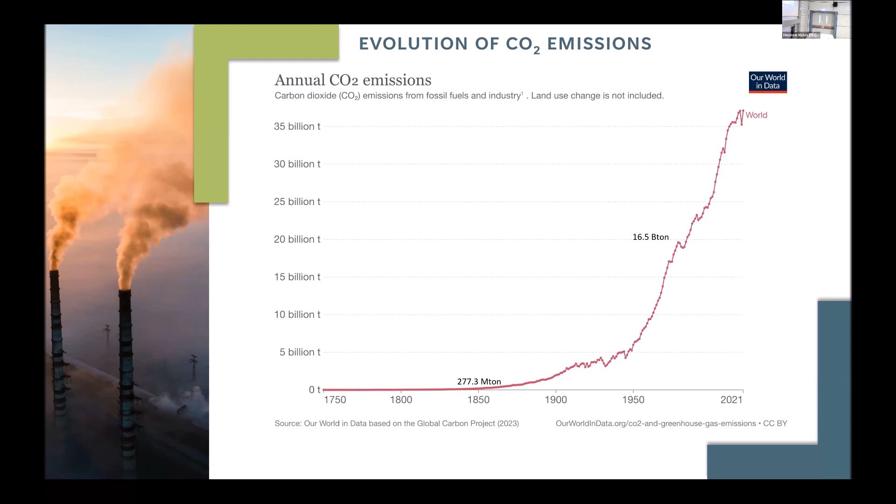When we look at that time, around 1856, we find the first recollection of a study regarding the effect that CO2 can have in the atmosphere. This woman, Eunice Foote, is a remarkable scientist, but also an amazing woman because she was responsible for women gaining the right to vote in America. She made a simple and straightforward experiment where she placed CO2 inside glass cylinders with a thermometer, and placed the cylinders in the sun. The ones with CO2 and water had a higher temperature, so she concluded that an atmosphere enriched with CO2 could in fact lead to higher temperatures.

So we had this information many years ago, but still we continued to develop our fossil sources based economy, and now we must solve this problem in a very short period of time. We could have had lots of time to start thinking about these things, but in fact only in the 70s did the first meeting of the United Nations occur to try to solve this problem. So we have a time span where we didn't do anything about this issue, and now we have to solve it very quickly in order to have a planet for the generations to come, and also for us to live a normal and healthy life.

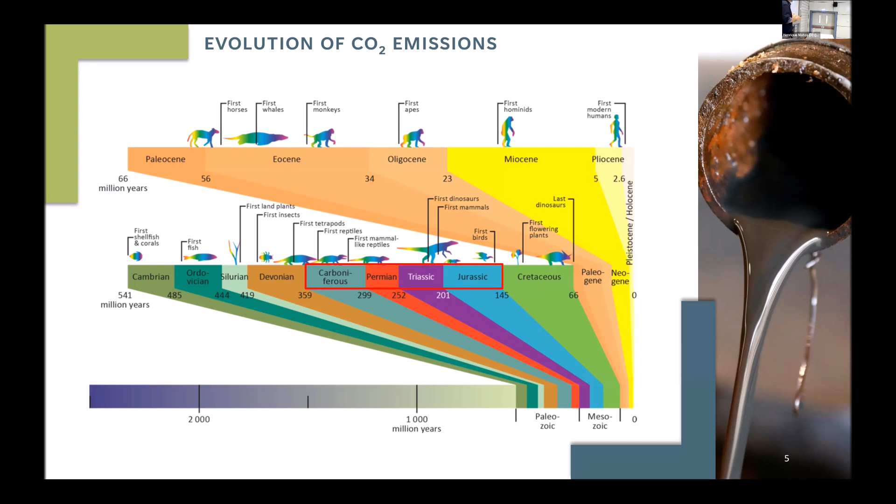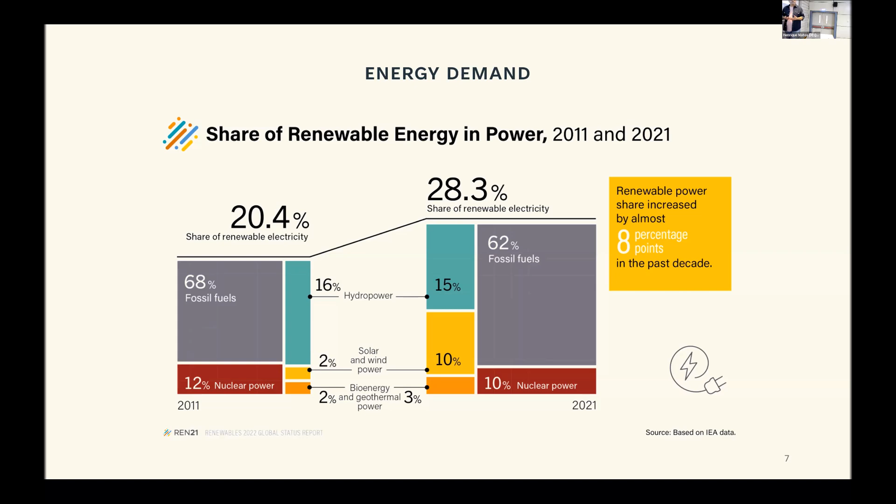When we look at chemicals, for example, they are still more than 80% based on petroleum sources, and we want to decrease this dependency. Regarding energy, we still have a lot of dependency on fossil sources - for example, more than 60% is still based on fossil sources. So we must find alternatives to this dependency.

And what can we do? I look here and I see lots of persons - Professor Carlos, Professor Enrique, Professor Joana, Professor Filipe - all working on trying to solve this problem. I think that in the end, the solution will be a contribution of all these works for a common good, because there will not be just one solution.

And of course we can do a lot, and while these processes are being developed, improved, and optimized in order to be more efficient, we can try to find alternatives. For more than 100 years now, carbon dioxide has been acknowledged as a raw material. We can use this raw material to produce several chemicals and energy. We know that carbon is the base of life.

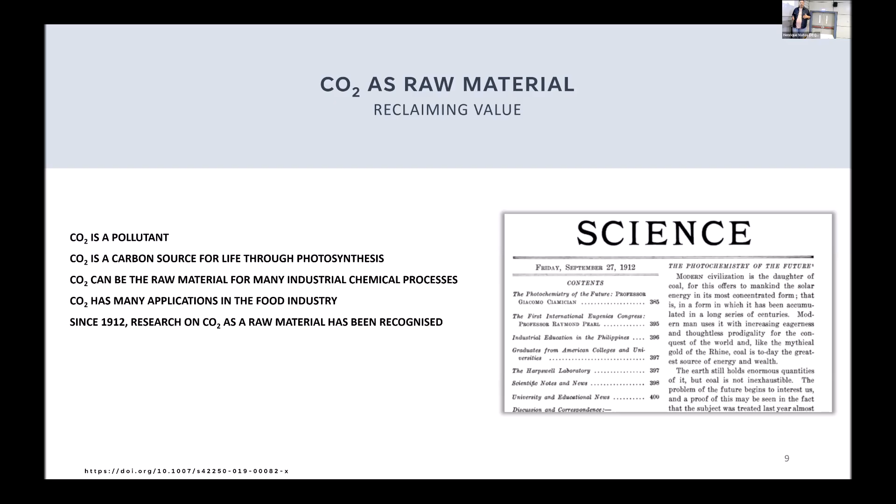So we have to start looking for a way to capture this CO2 in order to make materials, chemicals, energy, and most of you are working on those technologies. But meanwhile, while we cannot have the technologies mature enough or efficient enough to allow that we can capture the CO2 from the atmosphere and make it at rather larger scales, and also because I also think that the final solution for the problem will be a collection of several technologies that can somehow complement each other in order to achieve the neutrality that we are looking for.

And biomass, we know that biomass is a way, it's a raw material that is abundant, it's renewable, it's available, and it's carbon neutral. So we can look to this raw material and try to find ways to transform this raw material in something that we can use to make chemicals, to make materials, to make energy.

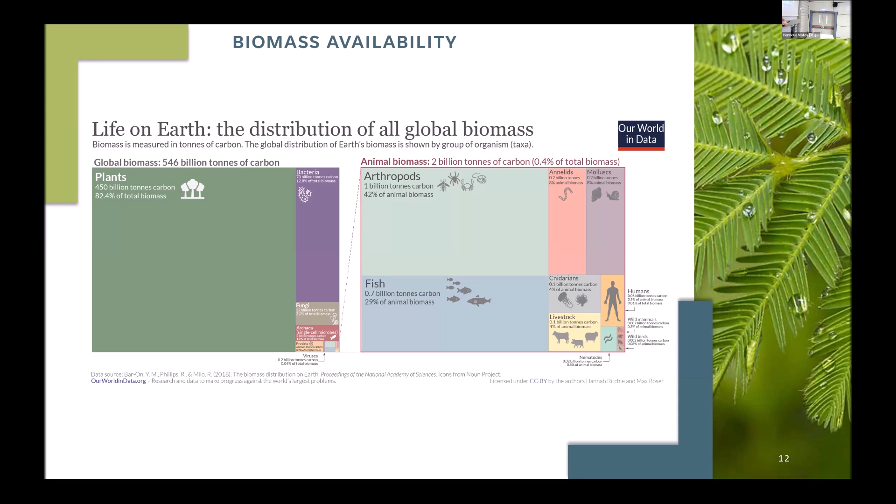And even more, because when we look to the global biomass, the plants are 80% of this biomass. And to put in perspective, animals are just 0.4% of all biomass. So we will see that plants are widely available and abundant. The challenge is how can we use plants to make materials, for example, plastics, fuels, and so on.

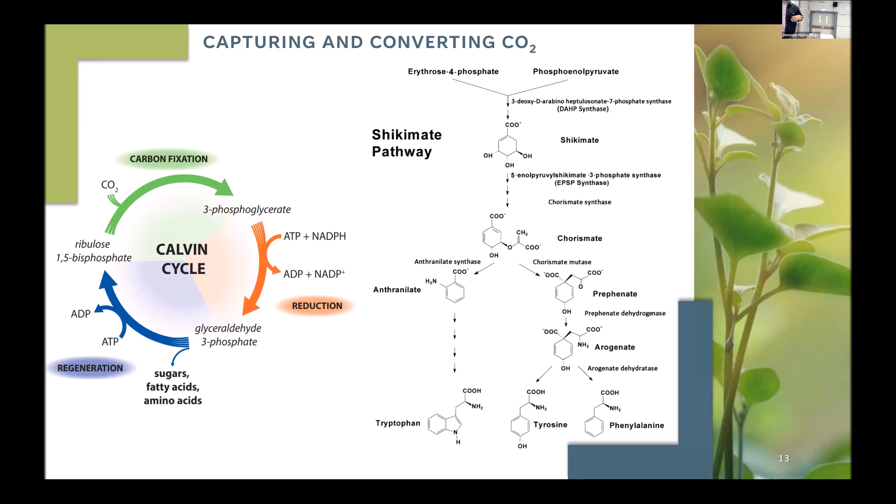We know that plants, through photosynthesis, can convert CO2 into sugars. Then those sugars, those carbohydrates, can be converted into, for example, phenylalanine through the shikimate pathway, and phenylalanine can then be converted into alkyl phenols. And we know that these carbohydrates and these alkyl phenols are then the main components of the three most abundant biopolymers: cellulose, hemicellulose, and lignin.

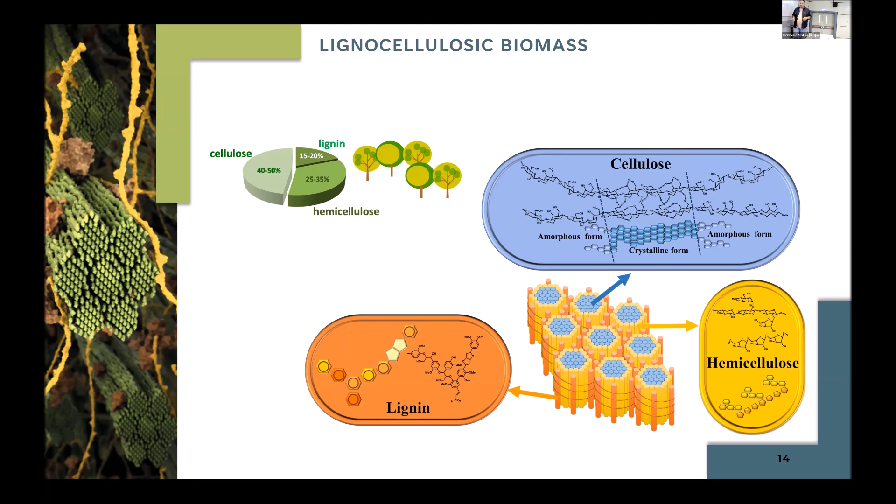So we have these three biopolymers, and now we just have to see how can we process these biopolymers in order to have something that we can work with to produce those chemicals, those materials, those fuels. And there is a lot of technologies that we can use to process biomass.

Well, the most primitive one was in fact used for combustion to produce heat. But by producing just heat or by combustion, we are losing all the potential of the biomass.

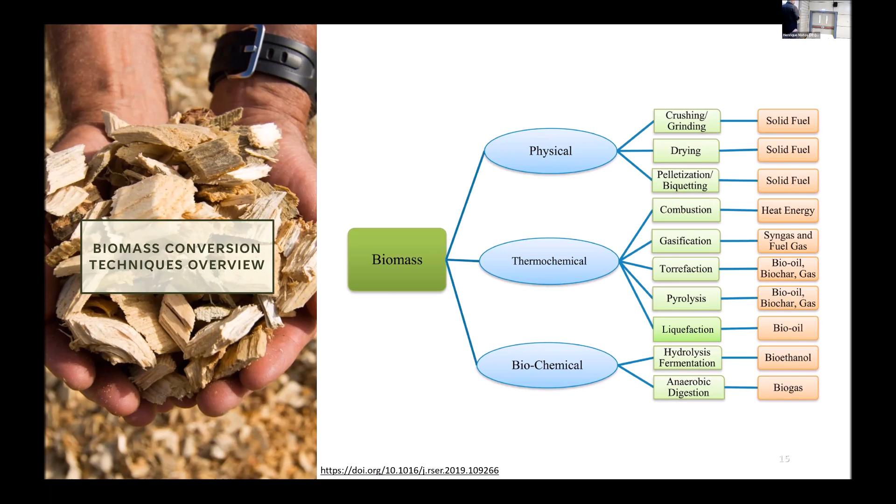The process in which I have been working on and in which I am most interested is the thermochemical processes, in particular those that can produce bio-oils. The bio-oil can then be used for several applications. In particular, to produce bio-oil, we have fast pyrolysis, hydrothermal liquefaction, and solvolysis.

On the other hand, the hydrothermal liquefaction and solvolysis, we can work with the biomass with moisture, for example. The one that I've been working with is the solvolysis. Hydrothermal liquefaction has to be conducted with high pressure and high temperatures, and the solvolysis can be conducted at atmospheric pressure and with the addition of a catalyst.

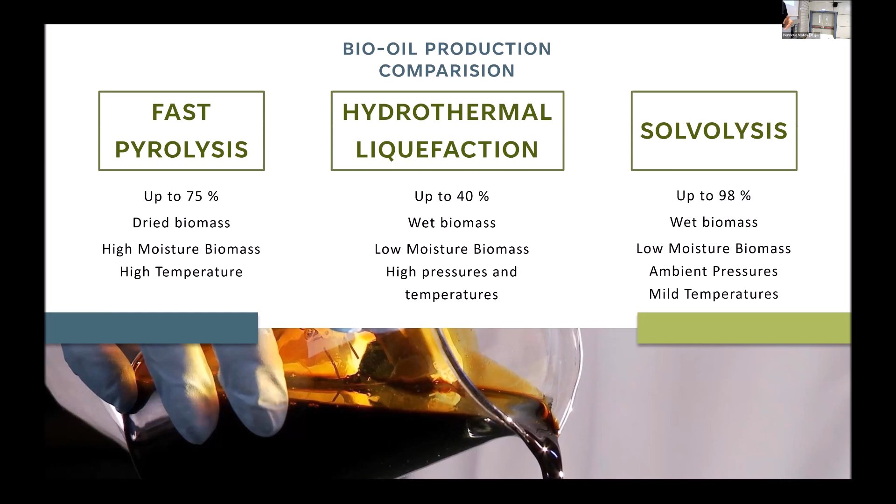Of course, the yields are different. Of course, for example, the solvolysis, the one that I work with, has the drawback that it needs a solvent, so we must look for greener solvents. But on the other hand, it requires less expensive equipment to work.

Regarding the composition, of course, we have different processes to produce bio-oils, and of course we will have different bio-oils. The one that I've been working with, the one from solvolysis, has the lower amount of oxygen, because most of the oxygen that is present in the biomass is eliminated through the dehydration during the process, and we lose that oxygen as water. And because water is being removed from the reaction as long as the bio-oil is forming, we are left with a bio-oil with less oxygen.

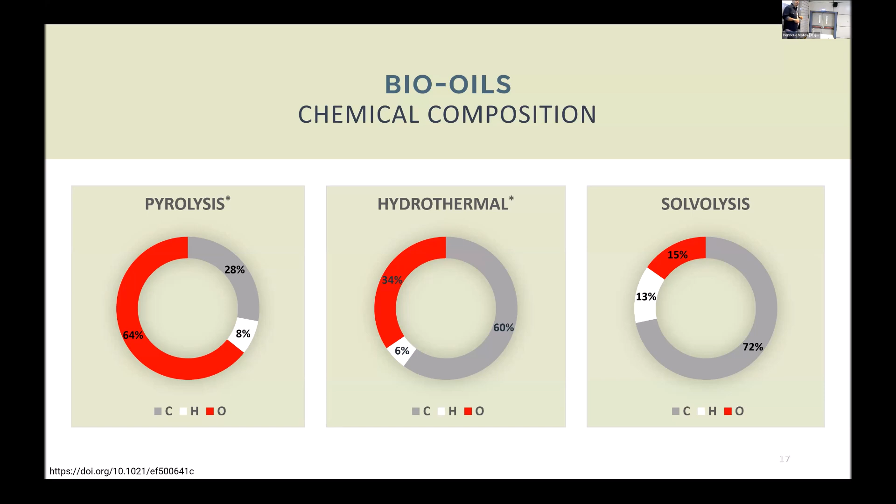So, and it is this part that we have been investigating, the applications that bio-oils can have. Because the production of bio-oil is quite well studied, the applications is where we have to make an effort in order to have real-life applications of the bio-oils, in order to see if we can apply this then in the future at a real-life scenario.

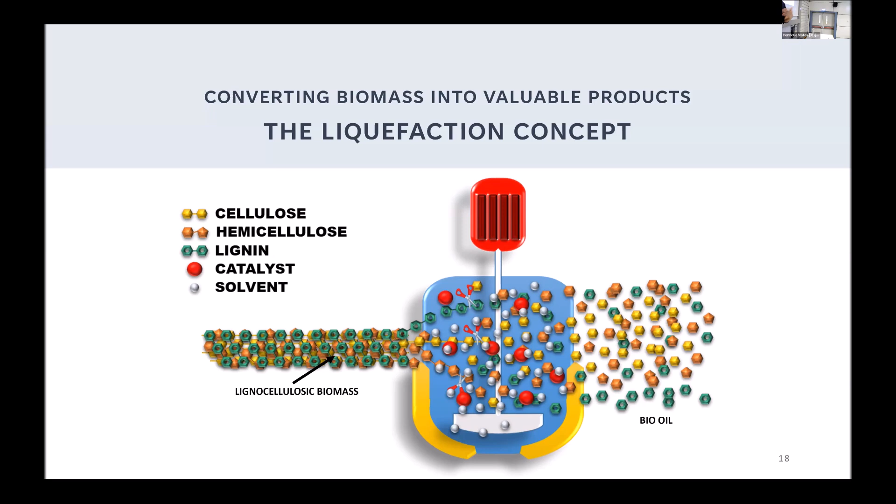So mostly what we do is we collect biomass and residues, we make the liquefaction, then we can separate those bio-oils into different fractions. For example, if I wash the bio-oil with water, I am left with an aqueous extract, an organic extract, but then, for example, I can distill the bio-oil and have a lighter fraction and a heavy fraction, so I can play then with the bio-oil in order to obtain some feedstocks for several applications.

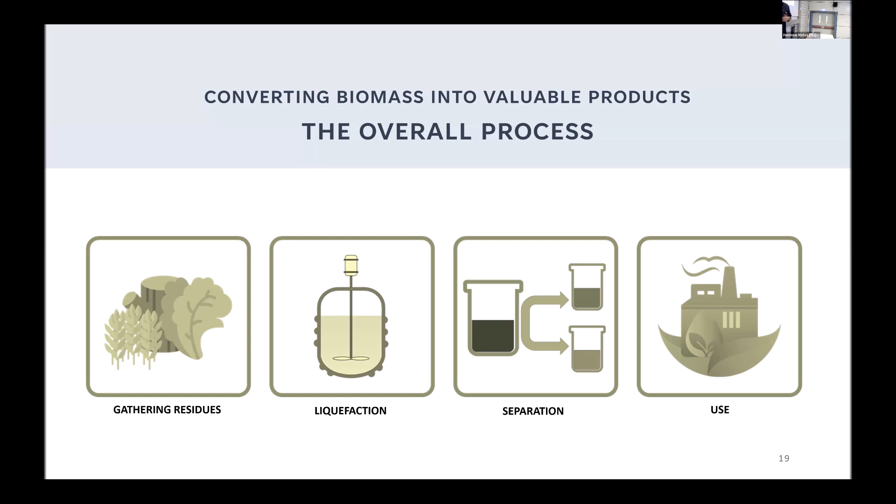Of course, we have applied this to lots of substrates. In particular, we are very interested in valuing residues. So we have applied this to sludges, to manures, to agriculture residues, to food residues. Well, we have applied this to a whole bunch of biomasses. It works well with almost any type of biomass, even with those with high moisture. For example, potato skin, potato peel has 80% moisture and it works quite well. Sludges, which also have a high amount of moisture, also work quite well.

And of course, in the beginning, we started doing the liquefaction with 2-ethylhexanol, which is a fossil-based solvent. But now we have moved on and we have studied other solvents, ones based on glycerol, for example, that are more sustainable. And that also gives very good results.

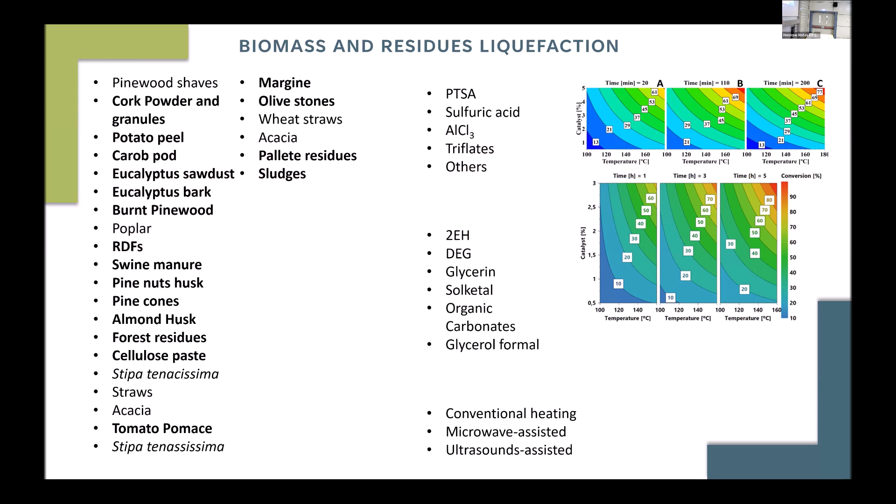The reaction can also be promoted with ultrasounds and microwaves, but what we get from using those technologies is not enough to start using them, because we have an improvement of 2 or 3% on yield, and it's not enough. So basically, as I told you, we have the biomass, we produce the bio-oil, we make several fractions, and then we study how we can value these products.

As I told you, we are studying these products to produce chemicals, energy, or bio-based materials. And this work started a few years ago when Cork Supply, which is a cork company, came to us and asked us to find a way to value their residues. Their residues are mostly cork granules or cork powder. And they wanted us to find a way to use those residues so that we can retrieve more value from them instead of just burning them.

So one of the first approaches was to produce a bio-oil from those residues. And then we were looking at how we can use that bio-oil to make something that they asked us. They asked us to make an adhesive.

And one thing at the time that we tried to do was to retrieve the sugars from the bio-oil, because the sugars are the products of the hydrolysis of cellulose and hemicellulose. And we tried to use these sugars to produce an adhesive.

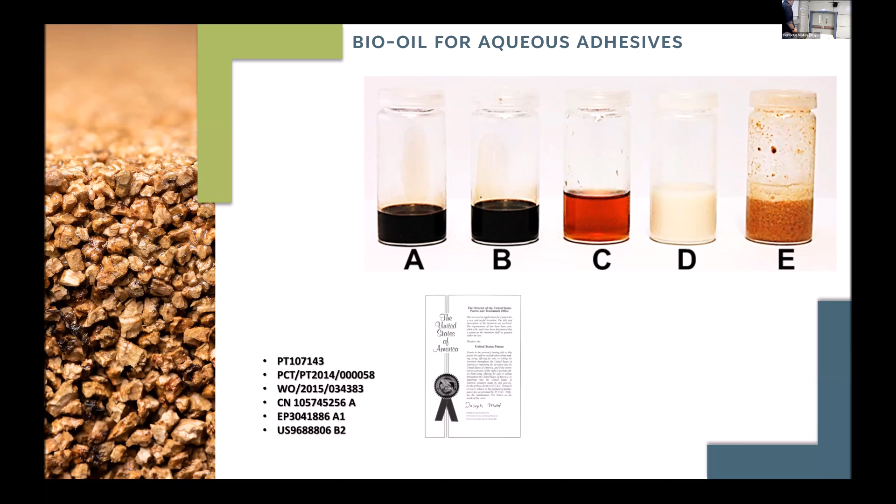And this adhesive that we made was an aqueous-based adhesive that is now patented in several countries. And we start by using small amounts of an isocyanate that is compatible with water. At that time, this small amount of isocyanate was still fossil-based. Presently, we already have a bio-based version of this isocyanate.

And we mix this isocyanate with our aqueous extract. But we weren't successful in obtaining a good adhesive, because the viscosity was so low that the adhesive drained from the material and didn't bond the material together.

And then we added some cork powder to increase the viscosity, and in that case we already had a bond. Then, after optimizing the formulation, we got this formulation where the bond was so good that when we made the torsion test, instead of breaking at the bond, we broke the material itself. So meaning that we have a very good adhesive.

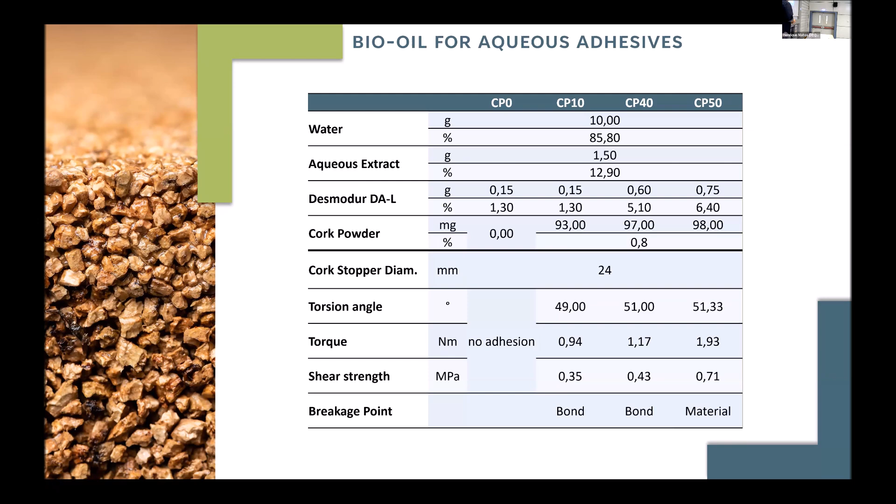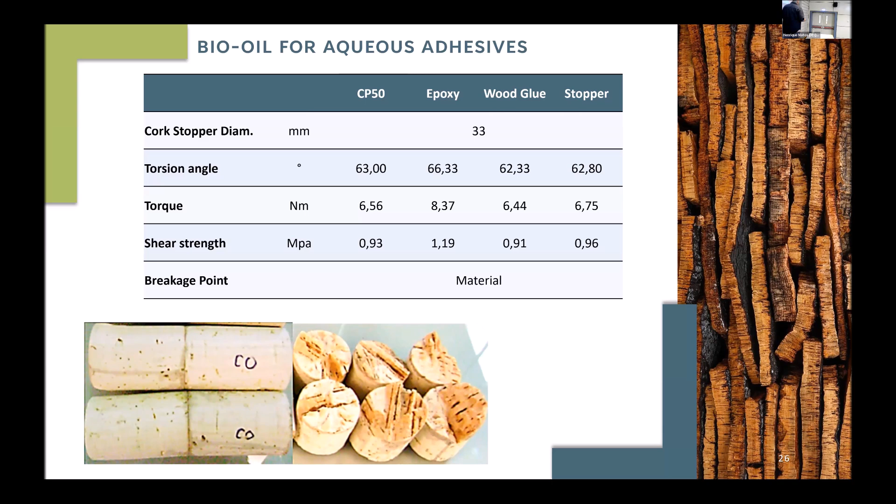We then compared this adhesive with other commercial ones, for example, with epoxy adhesives and wood glue adhesives, and the results of our adhesive were as good, and in some cases better than the commercial ones. And we see here even better than the material. So we were happy with these results. Then we tested this glue also with wood, and it works quite well.

Afterwards, another thing that we do, since we have an application for the aqueous extract, is why not use the organic fraction to produce foams. Polyurethane foams are made from an isocyanate and a polyol.

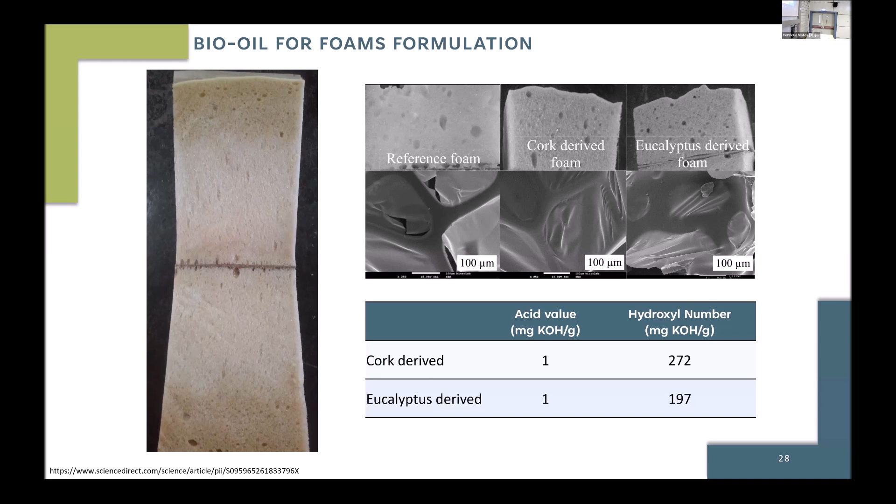Normally this polyol is fossil-based, so we envisaged that maybe we can replace this polyol with the organic fraction of the bio-oil. And the organic fraction of bio-oil has an OH number between 200 more or less and 300, which is common in fossil-based polyols, and has a very low acid value. So we decided to replace the whole polyol in the formulation of foams with two polyols made from eucalyptus and made from cork.

What we witnessed was that we have the reference foam, and the two foams we prepared - one from eucalyptus and one from cork. The eucalyptus one had a lower Young's modulus, but the cork one had very good mechanical properties. This is because cork has lots of suberin, and by having lots of suberin, we have lower contents of lignin. We know by experience that composites with lower amounts of lignin tend to give better mechanical properties. By using these cork-based polyols, we were able to produce a foam with higher amounts of bio-based materials. This was probably the second or third application we developed.

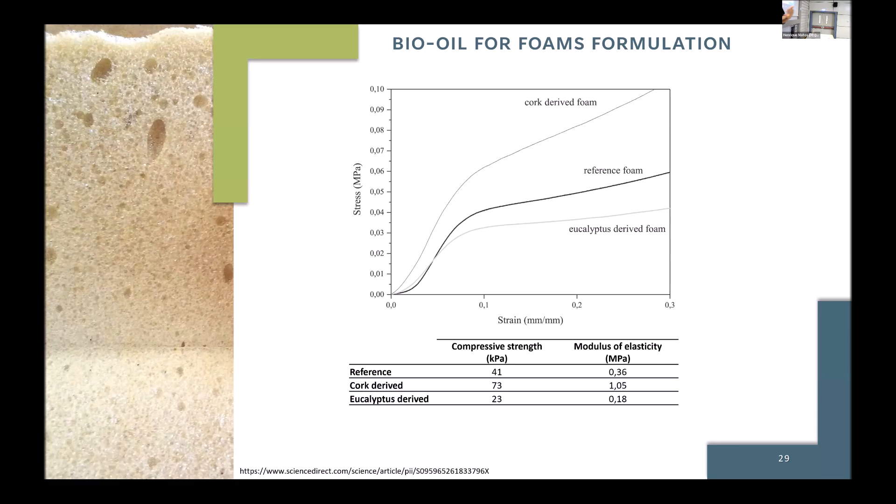Another application we started a few years ago as a test, and now on the Better Plastics project we are exploring, is to use part of the bio-oil in the production of bioplastics.

Polyhydroxyalkanoates are bioplastics produced by bacteria. Those bacteria take a substrate, normally carbohydrates, and transform those carbohydrates into energy, then store that energy as a bioplastic inside the cells - the same way we store fat. So they eat the carbohydrates and store that energy as a bioplastic inside the cells. They are called polyhydroxyalkanoates.

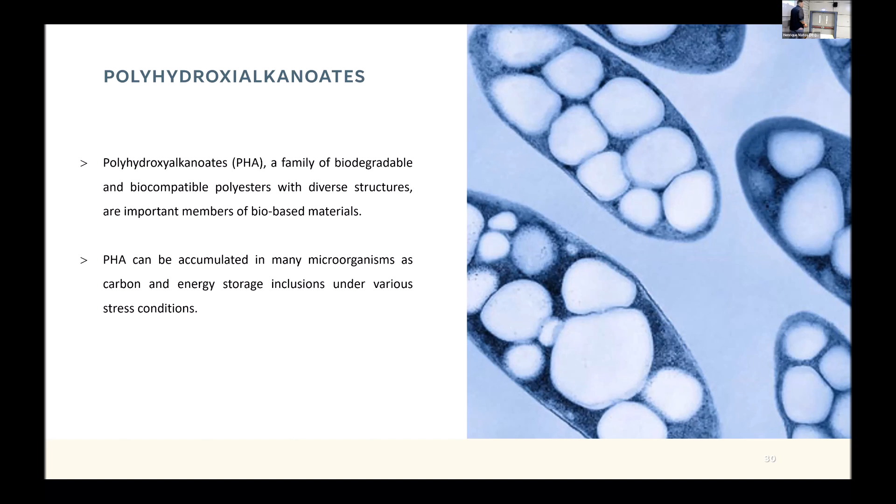A few years ago, we sent our aqueous extract to a colleague from South Korea who has great strength in producing this type of polymer. He tested our extract, and what we witnessed was that half the quantity of our extract was enough to produce the same amount of colonies he was able to produce with 1% glucose. Even in the accumulation of polyhydroxyalkanoates, just half the substrate of our extract was good enough to produce more bioplastics. The bacteria was also able to produce pigments, carotenoids, and the behavior was inverse - when we increase the amount of polyhydroxyalkanoates, we decrease the amount of carotenoids. This was the base.

Then, a few years later, the Better Plastics consortium invited us, or challenged us, to try this here in Portugal at FCT NOVA. At FCT NOVA, they also produce polyhydroxyalkanoates, and we wanted to see if our extract could help them produce polyhydroxyalkanoates for food packaging and films.

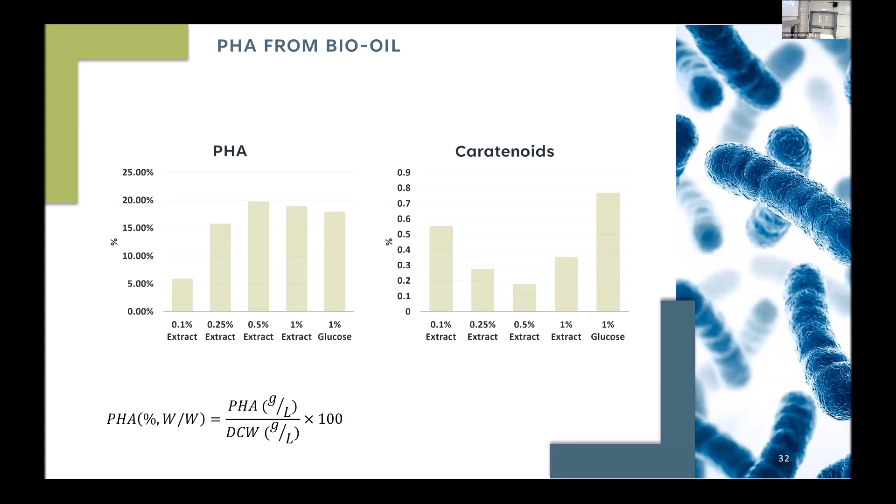As I was telling you, on the Better Plastics project, which is a very big project, they asked us to use our extracts - in this case, extracts from eucalyptus - to produce bioplastics. Our extract is mainly composed of fructose, xylose, glucose, trehalose, and saccharose.

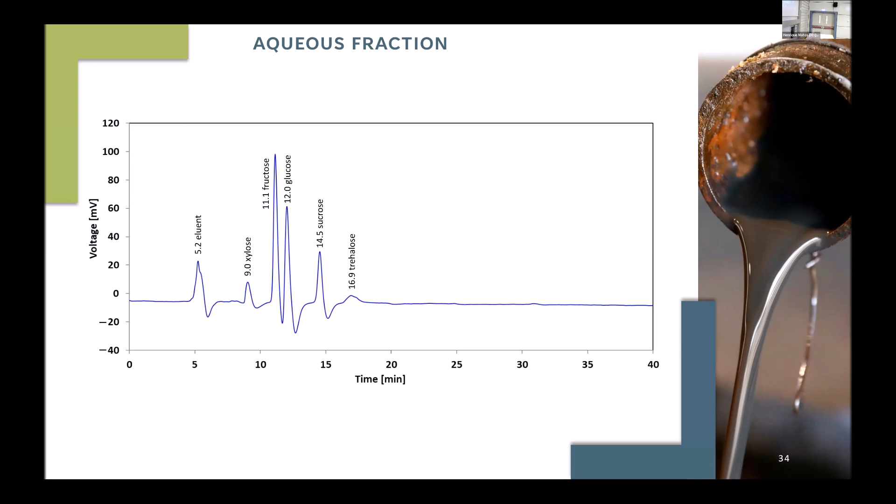With our extract, they were able to use it. They tested several strains and had very big growth on the colonies, but the accumulation of polyhydroxyalkanoates was very, very low. This means our extract is not toxic for the bacteria.

In fact, it promotes increase in the colonies, although it inhibits the accumulation of polyhydroxyalkanoates, those bioplastics. And what we thought was one of the things that could be happening...

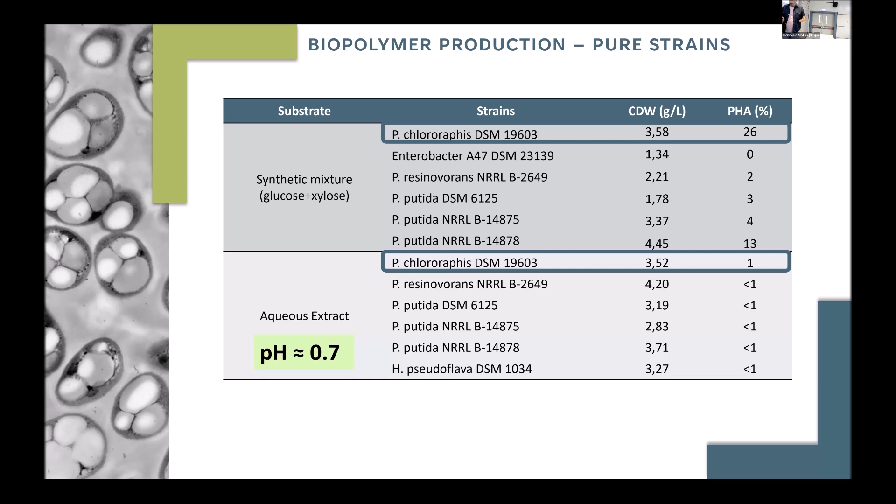The pH was very, very low, so we tried to solve this problem, of course, and tried to neutralize that pH with ammonium hydroxide. We had a bigger increase, but still a very small amount of bioplastic accumulation.

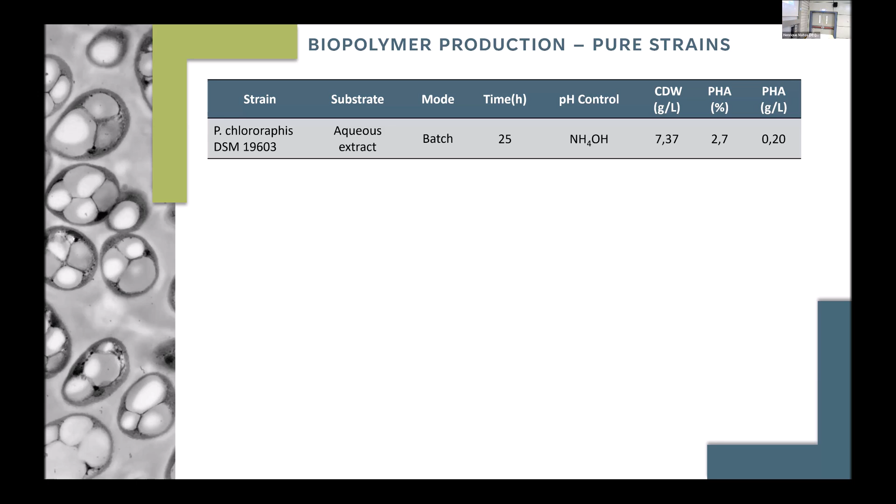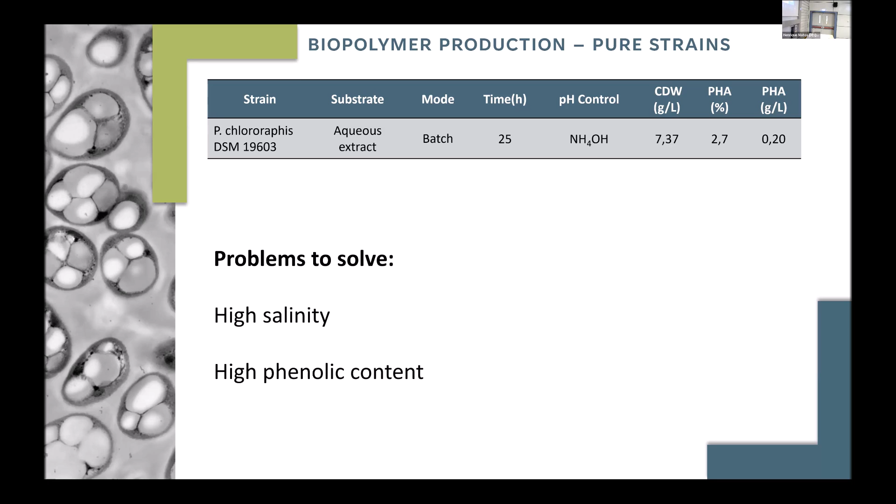Now we have two hypotheses we need to test to see if we can increase the accumulation. One is that while neutralizing with ammonium hydroxide, we were greatly increasing the salinity. When we increase salinity, the accumulation of polyhydroxyalkanoates is inhibited. So we have to solve this problem - which can be solved just by using an ion exchange resin instead of ammonium hydroxide.

One of the reactions that can occur is between the carbohydrates, the phenols, and some part of the solvent. One of those reactions is the formation of glycosides, where a sugar moiety is linked to another thing, for example a phenol, by a C-O bond. If those reactions occur, we can have some residues of phenols and aliphatics on the aqueous extract. We also know that the presence of phenols in the extract can inhibit the formation of polyhydroxyalkanoates.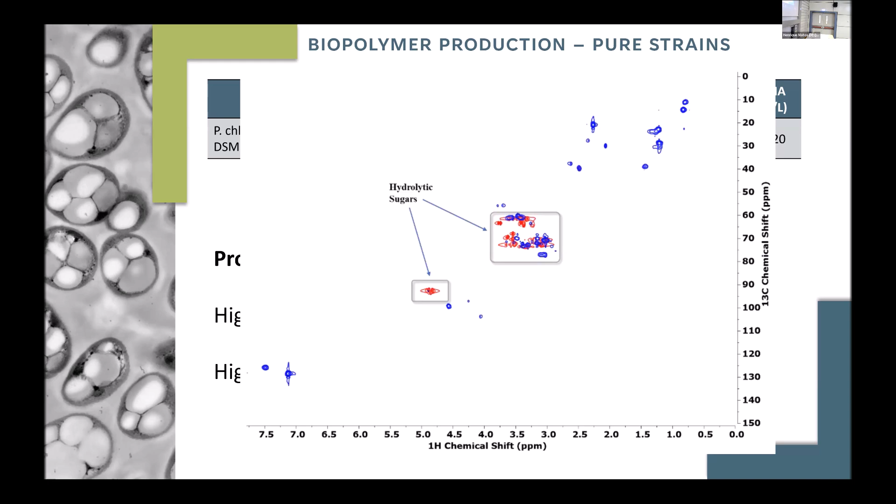One evidence that we in fact have some O-glycosides is these signals here, around 90 to 100 in terms of carbon, which are very typical of O-glycosides, of the anomeric carbon. So we have to find a way to remove the phenols in order to avoid inhibition in the production of the bioplastics.

We can do that by using this gel. This gel captures the phenols, and we are left with a phenol-free extract. We have done this, and at this point we are testing this clean extract to try to see if we can produce the polyhydroxyalkanoates.

Of course you can say we were able to produce this on the strains from our colleague from South Korea. Each group that uses this type of bacteria engineers the strains to use certain types of substrates. So each group has its own strains of bacteria. Some are more tolerant than others, but the ones that are not tolerant, for example, produce more PHA. So each group has its own bacteria, which is why we have some different results.

Another application, the obvious one, is to use the bio-oils as an energy source. When we look here, we see that the bio-oil has a better calorific value than the biomass. This can be a little strange - why would you have a better calorific value if you start from a biomass? It's because fresh biomass always has some moisture, and as I told you, during the production of bio-oil, lots of the oxygen content is eliminated through dehydration. So the bio-oil usually has lower oxygen content, which leads to a better calorific value.

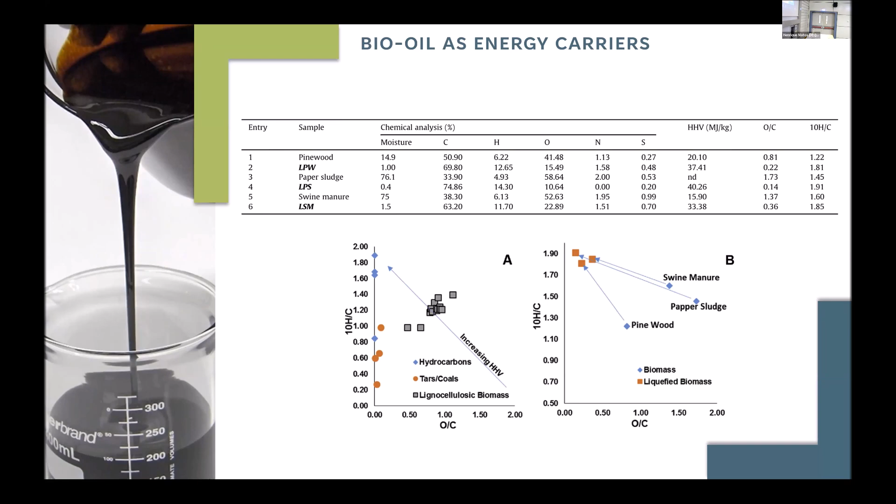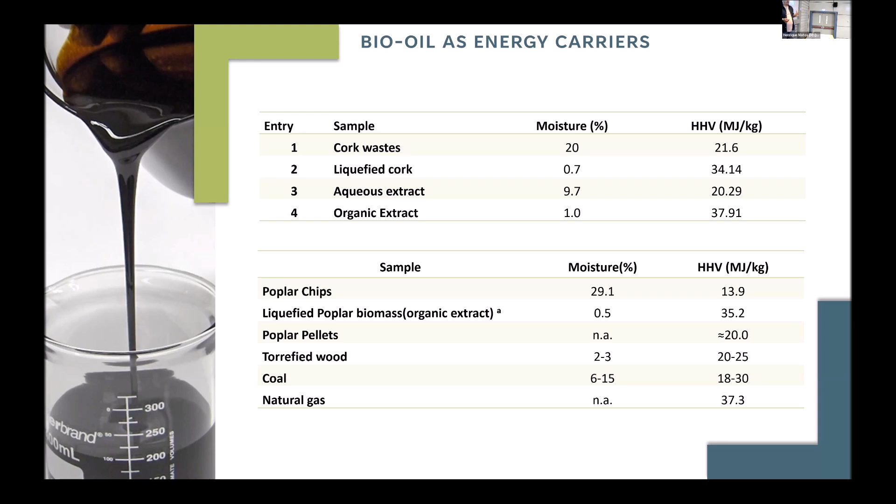This difference is even more remarkable when we talk about just the organic extract. If we take the bio-oil and remove the sugars, which are the most oxidized part of the bio-oil, the organic fraction that is left has a much better calorific value. We can see here, for example, when I remove the sugars, I improve the heating value. So we can envisage using this fraction as a fuel.

More importantly also is how this bio-oil, this organic fraction, behaves under oxidizing atmospheres. When we make the combustion of this bio-oil, the problem sometimes with this type of bio-oil is that when you try to make combustion, a large part of it is lost as volatiles. The volatiles do not burn themselves; they just vaporize.

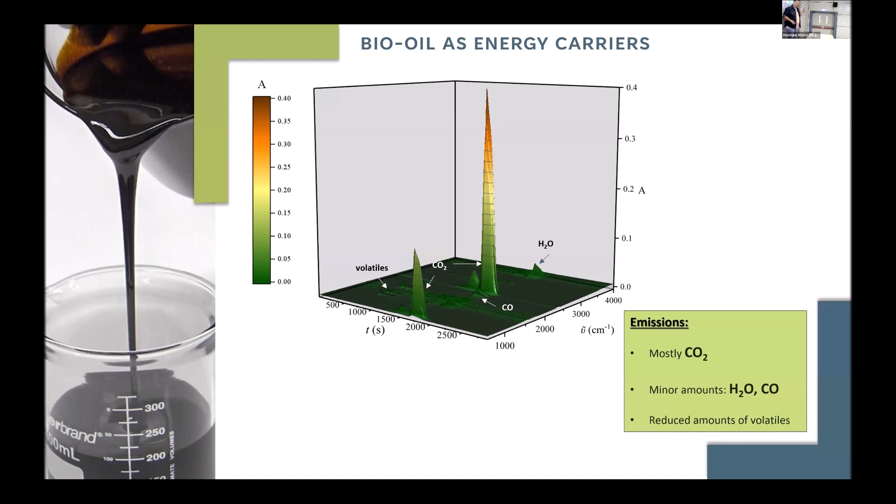What we see here is that most of our bio-oil produces mostly CO2, but we cannot forget that this CO2 is mostly biogenic. It also produces a small amount of water and a small amount of carbon monoxide, and then a very reduced amount of volatiles. This means maybe we can try to use this organic fraction of the bio-oil as a fuel.

To do so, we must ensure the shelf life of the bio-oil, in other words, that the bio-oil doesn't age. So we have tested accelerated aging, where 24 hours corresponds to 1 year. We see that regarding density, the bio-oil suffers no modification, meaning we probably have very low reactive compounds in the bio-oil. For example, this one is from pyrolysis, and pyrolysis oils have lots of aldehydes that are very reactive, so with aging there is an increase in density.

However, there is no increase on that density. So, but then Prio contacted us and challenged us to try to test if we could replace part of the diesel with some bio-oil.

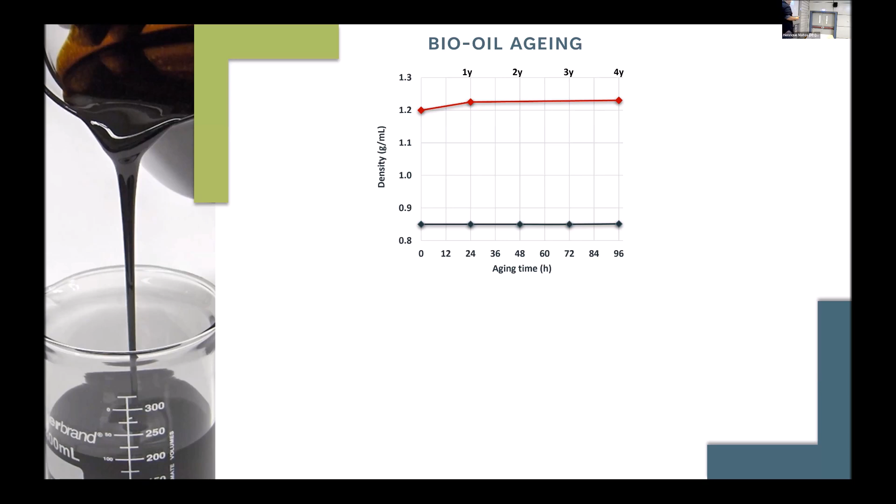This is very interesting, but we cannot forget that despite this bio-oil having lower oxygen content, it still has more oxygen than diesel. So the miscibility between both is not very good, so we have to make emulsions. We are now studying some emulsions using small amounts of a surfactant, a tensioactive, to try to make several mixtures with our bio-oil for further tests in the combustion engine, to see if, just like it happens now with biodiesel, we can incorporate some of the bio-oil on diesel.

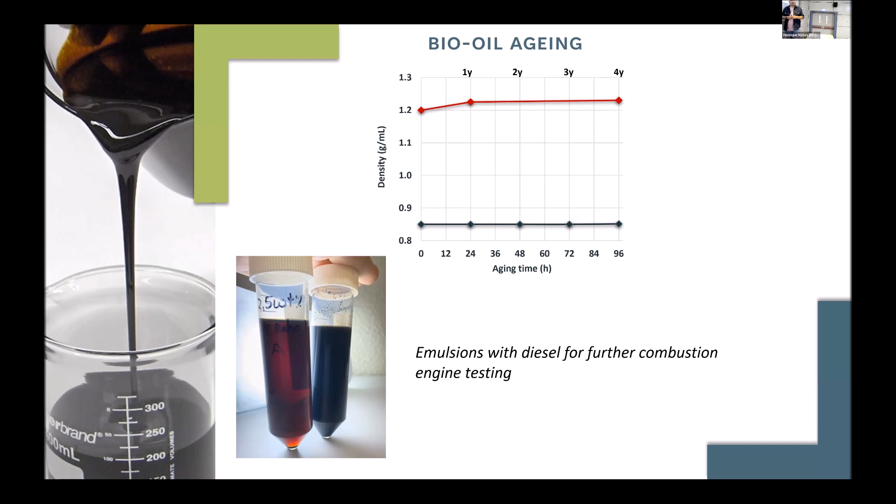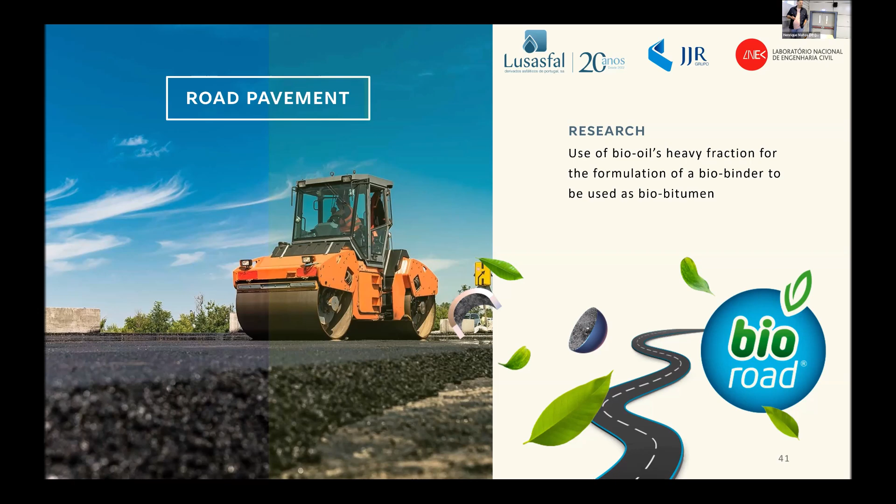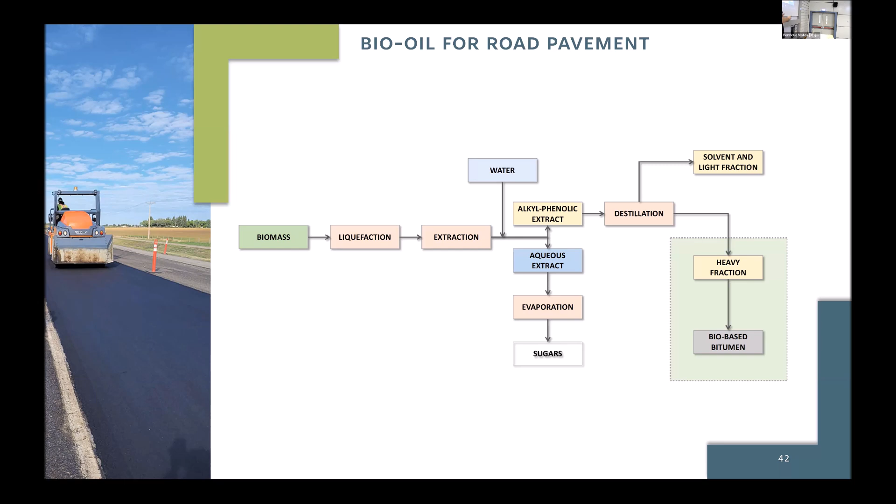This application is now having some very good results, and it has to do with, just like we produce bitumen by distillation of petroleum, the bitumen used on road pavement. We thought maybe we can distill our bio-oil and use it as a replacement in the bitumen for road pavement. So what we did was extract the sugars and then vacuum distill the bio-oils to produce a heavy fraction that can be blended or used instead of the bitumen.

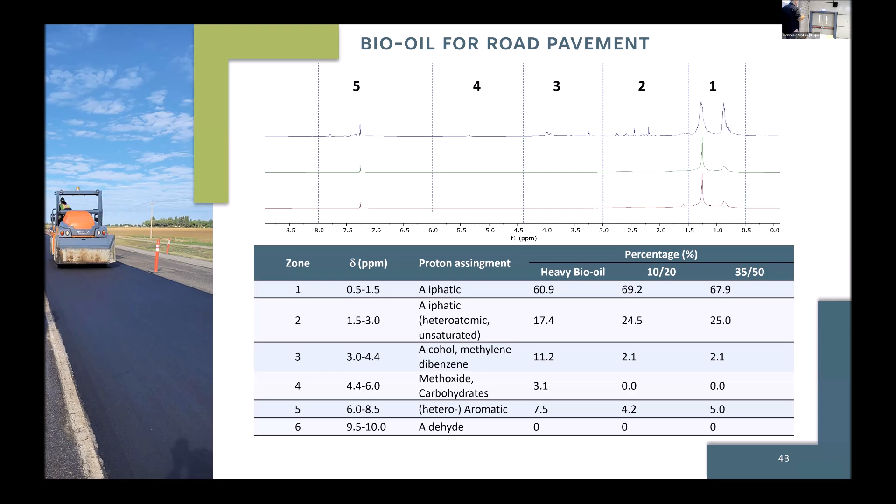But when we tested the rheological properties, the viscoelasticity of our heavy fraction, we saw that we have a penetration of 47. This means that normally the bitumen most used for road pavement is bitumen 35/50, meaning the penetration for that bitumen is between 35 and 50 decimillimeters. In fact, we were left with a penetration around that value.

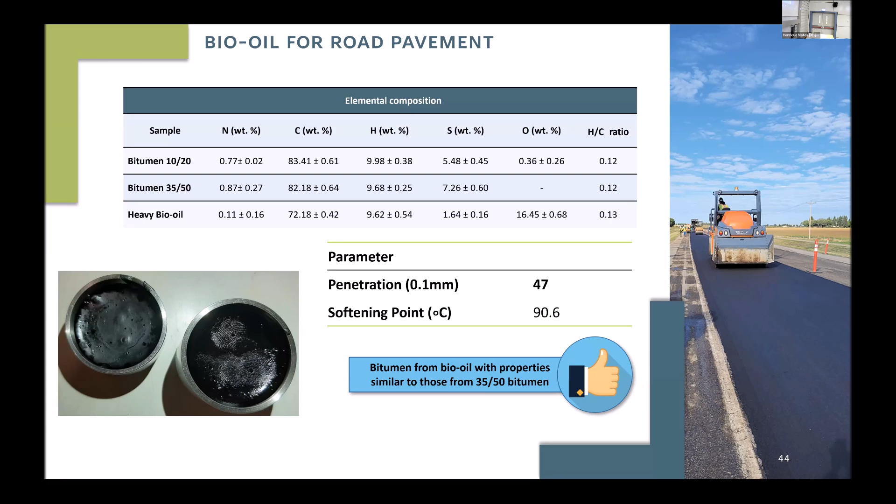The problem was the softening point was quite higher than the one we used. But since the penetration, the viscoelastic properties were so good, we are now trying to make a test. On the beginning of next week we will make a test road, a part of a road between Fatima and Batalha and Alcácer do Sal, where we will replace 11% of the bitumen with our heavy fraction.

And we will see how the road behaves when we replace this fraction, to see if in the future, probably we will not be able to replace all the bitumen, but if we can replace a small part, I think it's good. So next week at the test site we will be doing these things between these two places, and we'll see how it behaves. I hope it behaves good.

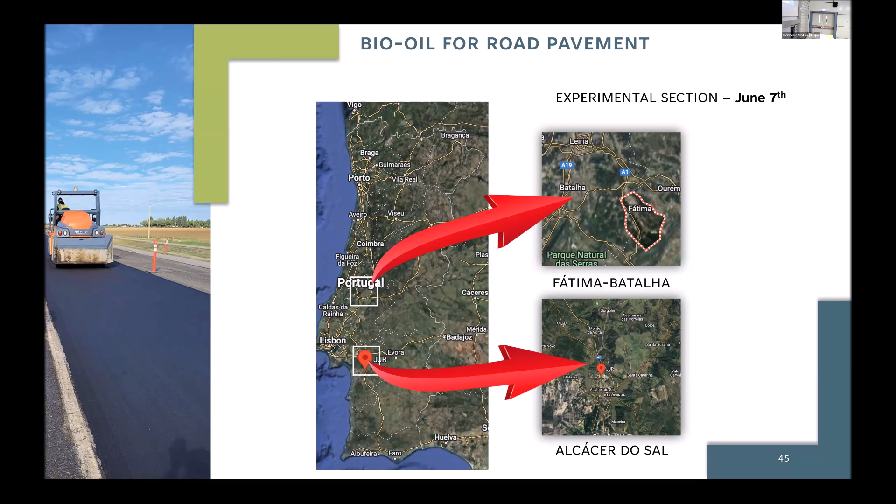And of course, by now we are thinking, okay, so he's going to make steam reforming of bio-oils. Yes, that's exactly what we're trying to do. The steam reforming of bio-oil is not very new, it has already been studied. Most of the studies, instead of using real bio-oil, use model compounds. And the thing is, why is that?

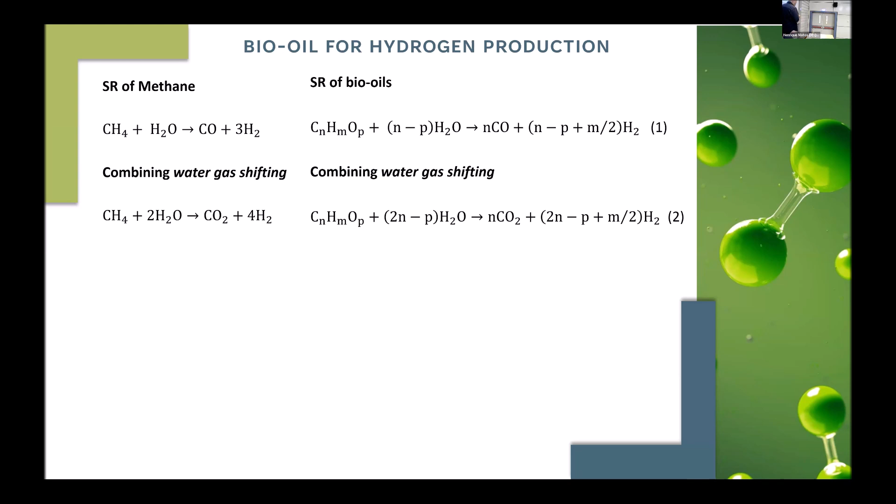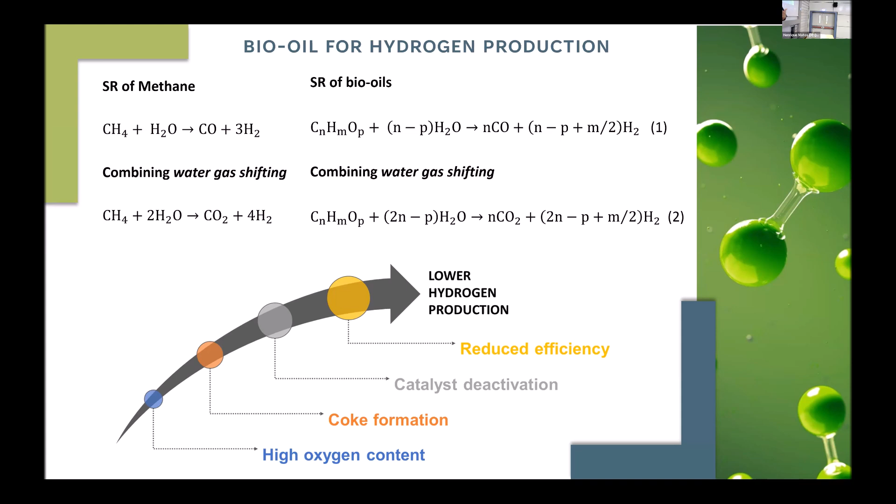Because the bio-oil has more oxygen, once again, oxygen is the one that always messes with us. Because our bio-oil has more oxygen than natural gas, for example, the higher amounts of oxygen tend to lead to coke formation, which in turn deactivates the catalyst, and of course leads to lower hydrogen production. So what can we do about this? It would be very interesting if we can take advantage of the mature technology that steam reforming is, to use the installations that are available but not working, and to use a sustainable feedstock that allows us to produce sustainable hydrogen, and even with the formation of CO2, this CO2 is biogenic.

And we are still starting to work on it. The bio-oil that we normally produce has much lower oxygen content, which is an advantage. Maybe we can take advantage of this lower oxygen content. But we also need to design more effective catalysts that can withstand this oxygen content without being deactivated by coke formation.

And this is what we are doing now. In fact, there is lots of potential with this technology, because steam reforming has been around for many years, and we just have to find an alternative feedstock to use this technology, without the drawbacks that fossil sources have, which is the enormous amounts of CO2 emissions.

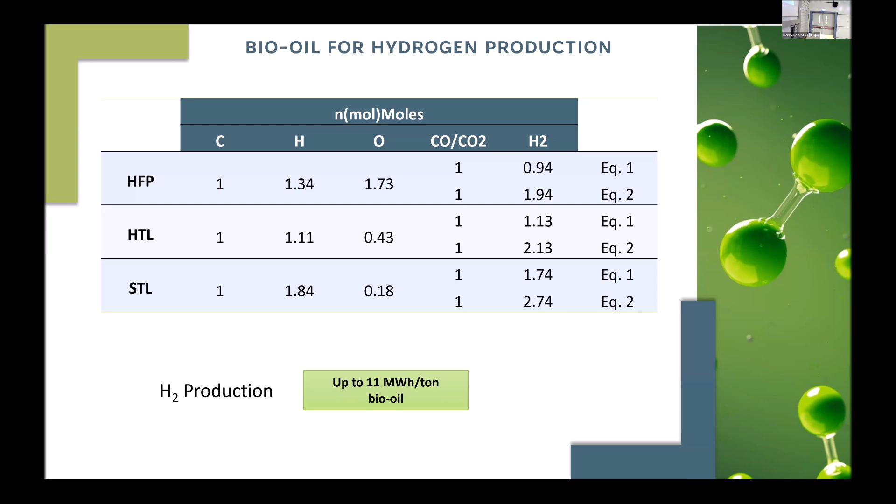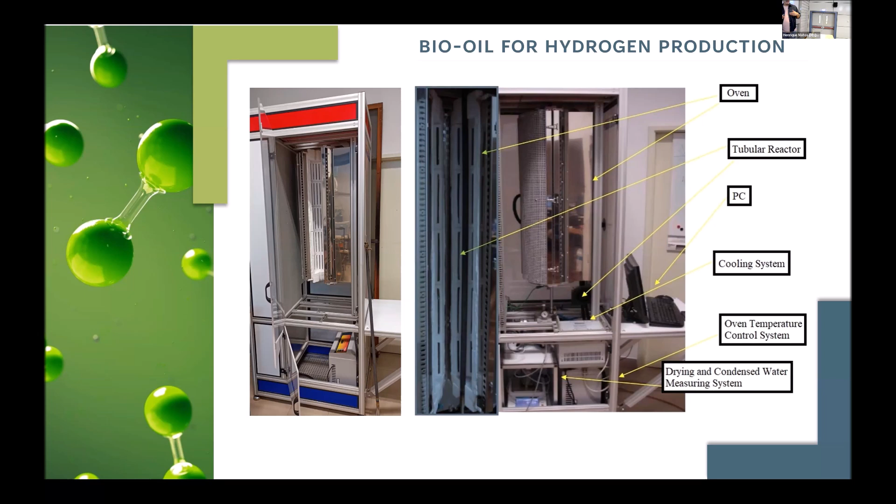We technically have a steam reformer, which was deactivated in the mechanical department. We are now currently putting the steam reforming back together, building a new tubular reactor, and very soon we will be starting tests to see if we can replace fossil sources with a more sustainable one to produce hydrogen in a cleaner way.

All of these applications are very interesting, at least for me, but this can only work if it works just like a petroleum refinery does. In a petroleum refinery, all products are valued, there is no waste. When we design a process today, we have to keep this in mind. We have to work under the biorefinery concept, where everything is valued, there is no waste, no residues.

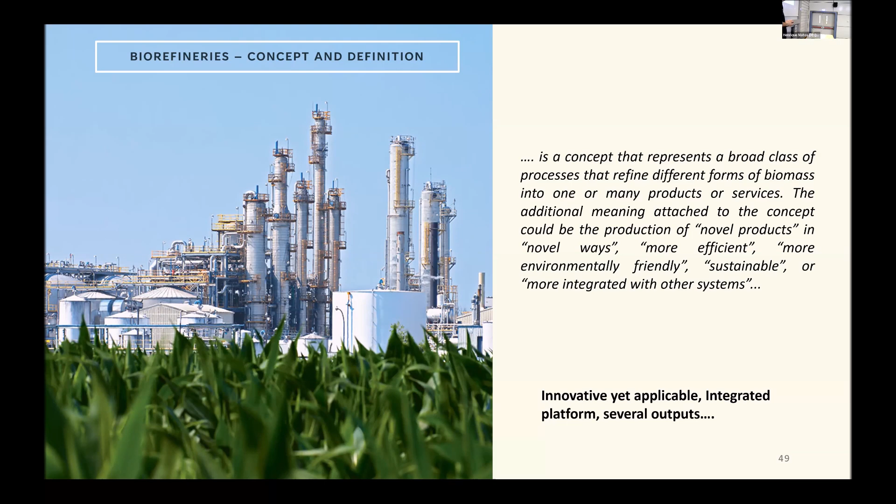For example, during liquefaction we produce a solid, a biochar, and that biochar has to be valued as well. So this is what Bio2Value, which is part of my research contract, aims to do - develop an integrated process that has several inputs, and all the outputs are valued.

So we have a central point, which is the production of biomass, and for this part we are going to test three processes: pyrolysis, hydrothermal liquefaction, and also solvolysis.

Presently in the department we are also available - now we can do hydrothermal liquefaction, and soon we'll be able to do pyrolysis as well. We'll be working with colleagues from Italy and Brazil who will help us learn these two technologies, since we already have expertise in solvolysis. To avoid starting everything from scratch, we'll get help from colleagues, and we will see which bio-oil will be better for four applications.

One is for the production of membranes for the separation of CO2, and for CO2 capture using the biochar. The biochar is a porous solid with lots of carbon, so we will try this to retain CO2 and to separate it.

Another application will be to use the aqueous extract to produce not only polyhydroxyalkanoates, those bioplastics, but also bioethanol. This will be done with our colleague in South Korea who, as I told you, has very tolerant strains of bacteria.

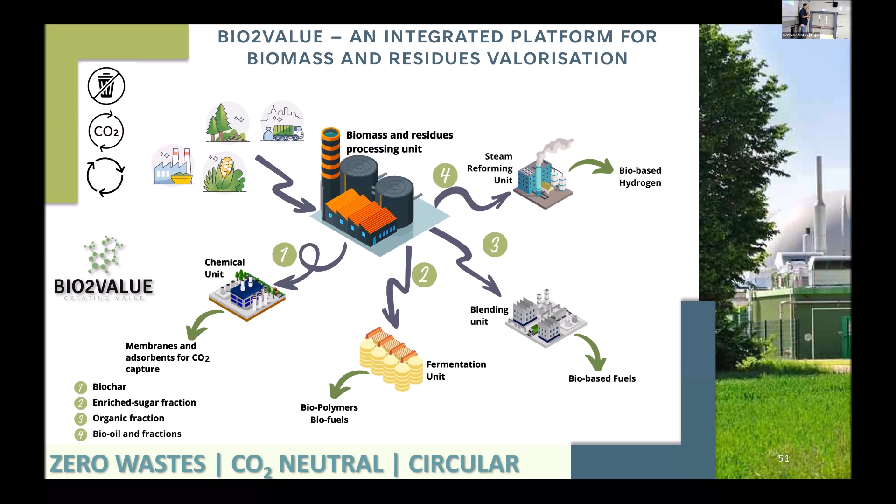To end, if someone asked me if bio-oil can indeed solve the problem, I would say bio-oil by itself, the production of bio-oil, will not solve any problem. It is a contribution, not a solution. We still have lots of work to do, but I strongly believe this technology and these applications can contribute in the future, along with other solutions, to attain that decarbonization, that neutrality, the circularity we are all looking for. Okay? So thank you very much.